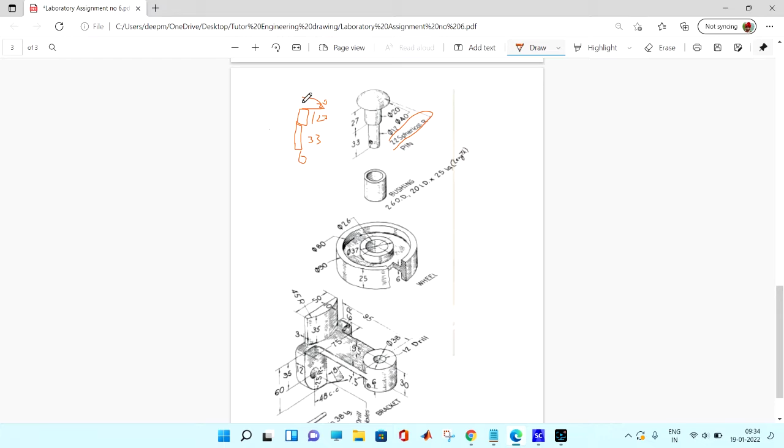Similarly, for this also we will make a rectangle. This is a rectangle of 10 by 27. This will be 27, and then we have to draw one of 20 mm radius. Over that we have to make a spherical radius pin. Okay, this we will revolve 360 degrees, then we can make this one.

Similarly for the bushing, we can make two circles, and then we can extrude it or pull it by 25 mm. This we will make in a similar fashion, similar rectangular blocks, and we are going to pull it about these axes, sorry, revolve about these axes. Like this we can make the different elements.

So let's see, and we can draw this one. The dimensions you have to find out, because it's very easy. When you draw it from here, you can see that the inner is 13 mm, so this distance from here to here is 13 mm. Then this small rectangle is 37 minus 26, that is 11, divided by 2, that is 5.5. The height is 25 mm. Like this you can find all of these things.

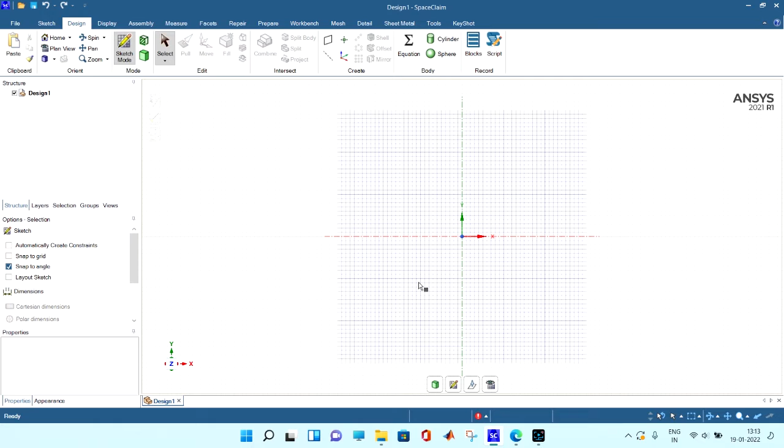Now we are going to draw the same thing. First we have to select the XY plane, click it here. Then, as I explained, we are going to first draw the pin. For drawing the pin, we have gone in the sketch and took the rectangle. The pin dimension is 6, tab, 33, press enter.

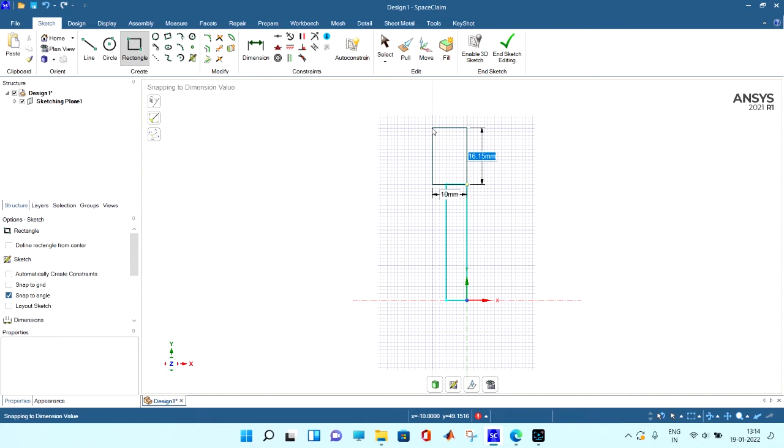Then scroll your mouse, you can increase or decrease the size of the figure. Then the shank portion of the pin is having the diameter 20, so I'm using 10, tab, 27, then press enter. Then we know that there is a top spherical cover, which is having a diameter 40, so radius 20.

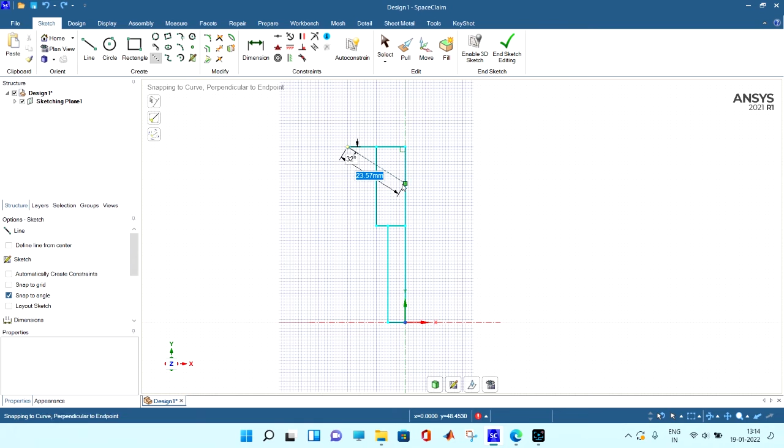And they have mentioned there that it is having the length, diameter of 40 and the top radius is 22. So this line should be of 22. This is coming here, so Control Z. We want this, actually we want the 22.

Okay, this came the 22. Then we can take a circle here, we take the center there when we are saying it, that it should be like this. Okay, this radius is actually 22.

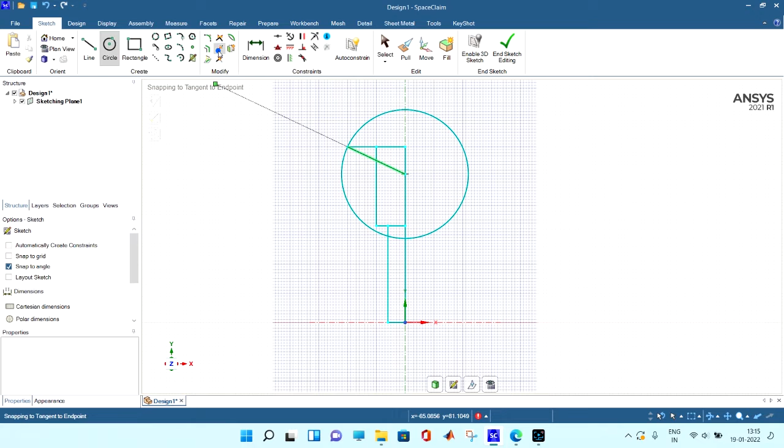Now we can go here, we can remove. If you remove this part, then you know it will remove that also. So just gone there. Now we have made this.

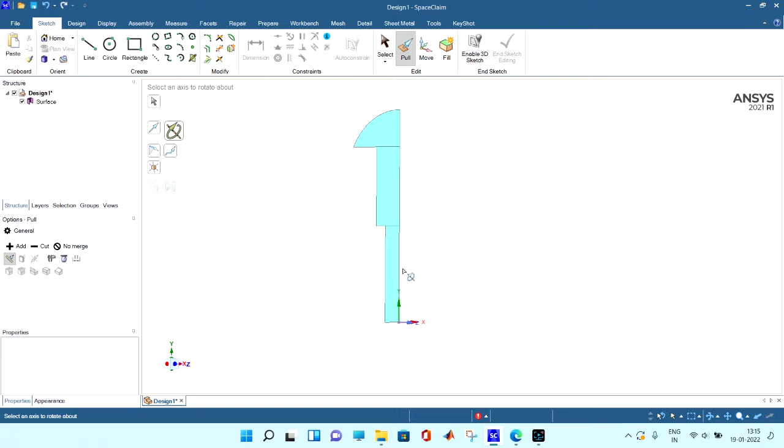After making this, we are going in the 3D portion, and what we have to do with this, we have to use the pull tool, we have to use the revolve. It is asking select an axis, it is asking select one or more faces. I am control 1, control 2, control 3, 3 faces, enter, press the space bar, then this will come.

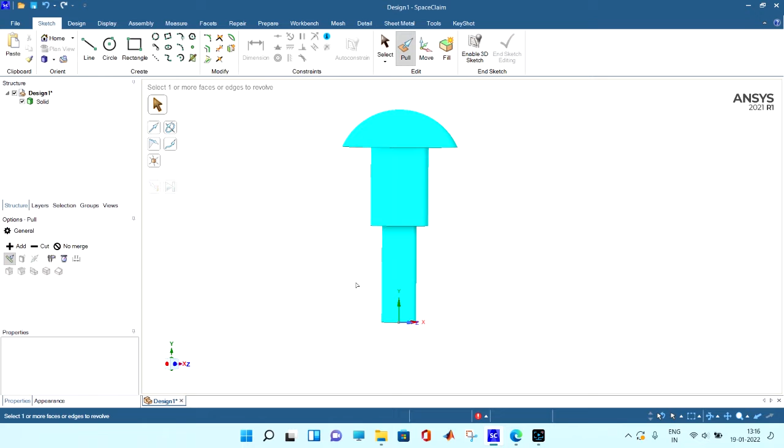You have to press how much degree you have to rotate it, revolve it. I put 360, then you can see that my pin has formed. So I'm going here, I'm saying rename it with the name pin.

Okay, I have not put the hole here which was available there. I'm putting it into a move to new component with the name pin. And just I'm saying it, hide it.

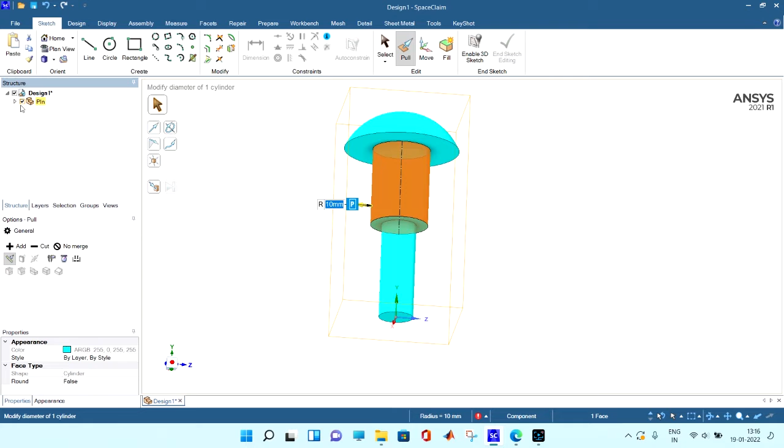Now I am going for the again new design sketch mode in the XY plane. I'm always like to make in the XY plane. I'm click it here, and you know that what actually I'm going to do. Now I'm going to make the bush.

The bush, we have rotated, if you know that the pin we have made in the XY plane, and when we make it in XY plane, then it has rotated in the Z plane actually. So if we make it in the XZ plane, then it will be easy for us.

XZ plane, in the XZ plane we are going for the circle. The bush is having the inner diameter of 20, enter. The outer diameter is how much? 26. And just we are going to make it solid.

Then we are here, we are making it delete. After delete, we have clicked it here. We are saying the pull tool of how much length? Of 25 mm length. This is of 25 mm length.

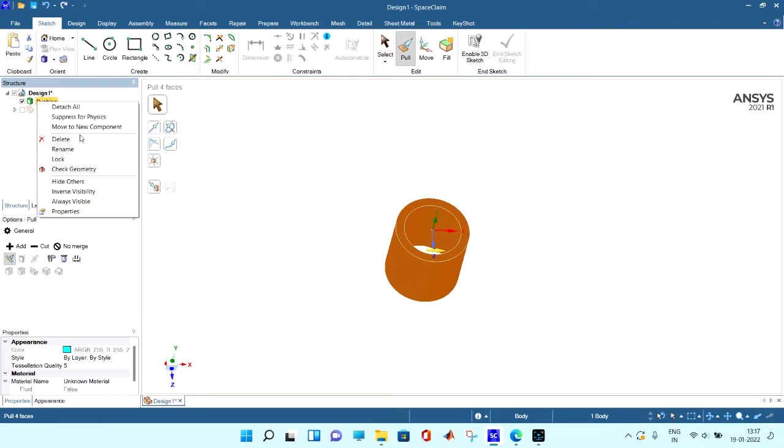This bushing is ready. We are going to rename it bushing. Then we have gone to move to new component, bushing. Then again I'm going to hide it.

Then again now I have to go to make the wheel. For the wheel also I'm going to make the XZ plane. In the XZ plane I'm going again sketch mode in the XZ plane. Okay, I'm not going in the XZ plane.

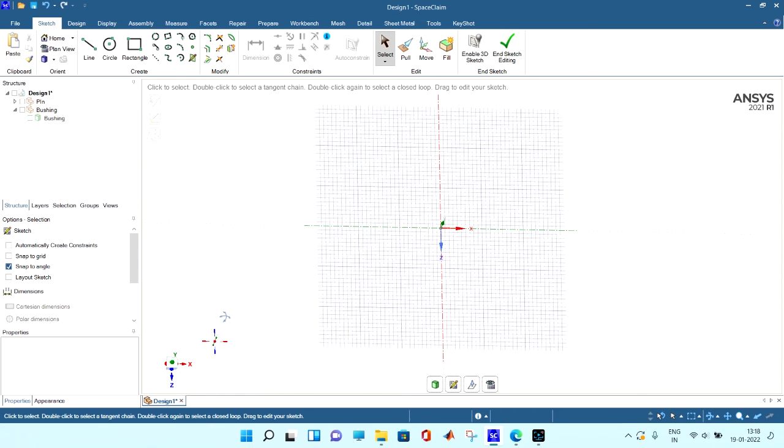I am going in the XY plane again. Why am I going to the XY plane? Because again I want to revolve. How do I want to revolve? This is my line from the center.

This is my reference line. From my reference line, what I am going to do is I know the dimension for the wheel is how much? That is 5.5 to 13... 5.5 to 25, sorry. So I'm going from here, that is 13 mm from here.

Okay, but I don't want the line here. Actually, I want the circle. So I want the rectangle, and from where I want it, actually I want it at 13 mm. Just go from here.

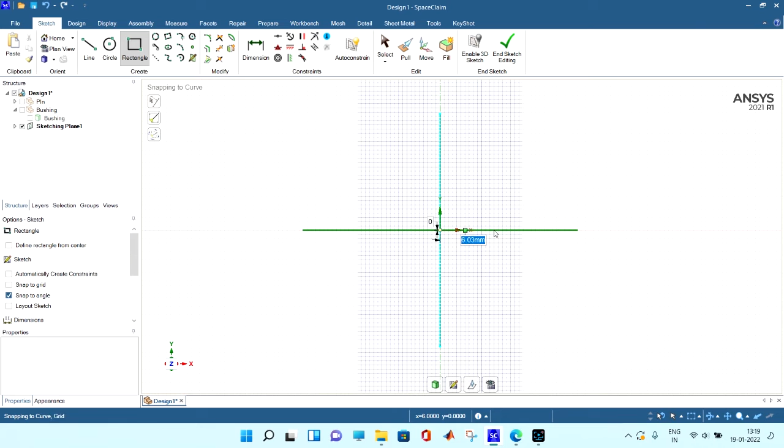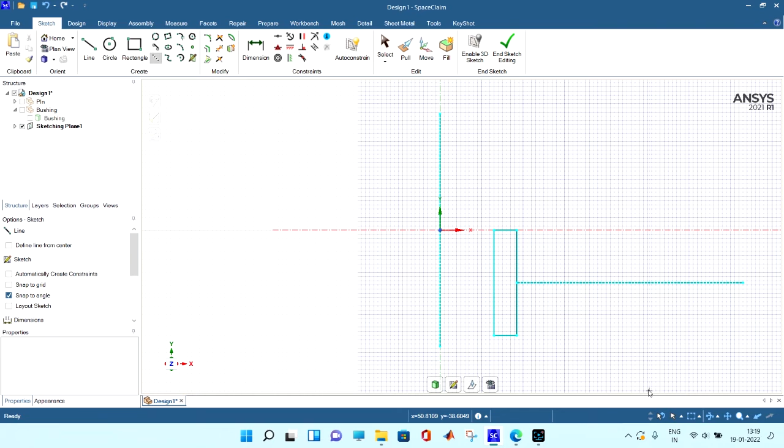I should make the rectangle at 13 mm from here. And what is the dimension of this rectangle? That is 5.5 tab 25. Okay, and we know this is the center line. We know we need this center line. We can draw it like as it is.

Now from this center line, actually we have to make a web, which is having 25 mm of length and 6 mm of height. So I'm again saying the rectangle, we are saying the shift, we are saying the 3 mm. That is 0 tab 3.

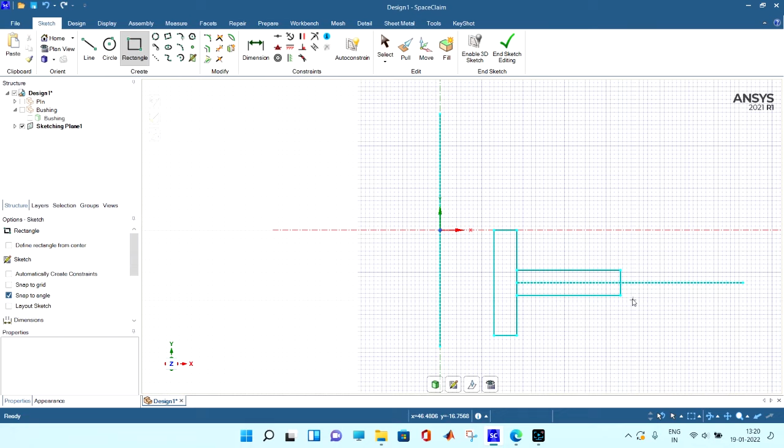When I'm going here, then I'm again asking the dimension. I know this, I have to take 25, then in tab I have to put 6, then enter. Then what I have to do, from this line I have to make how much? 25, the top. So means to say this is also 25. So this line is clear. Height is 25, but what will be the length of this one?

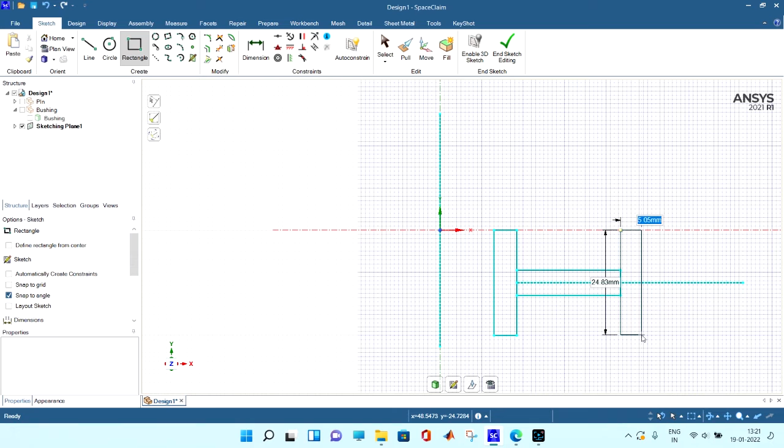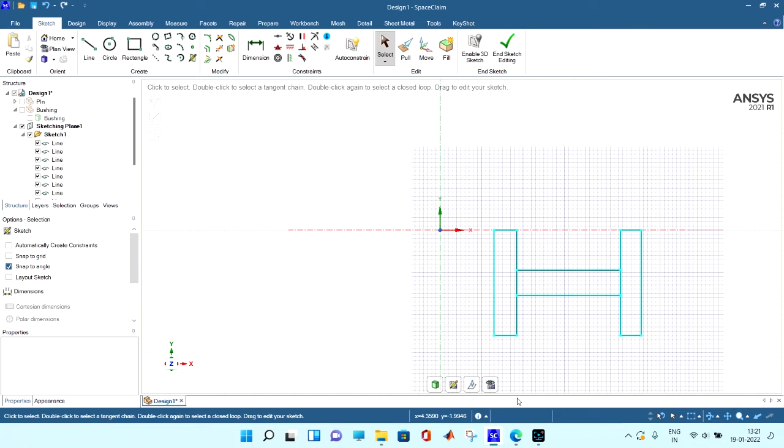This is of 5, tab 25. Now you can go and you can delete this if you want. Then you can delete the construction line. I have deleted that construction line also, but that delete is not required.

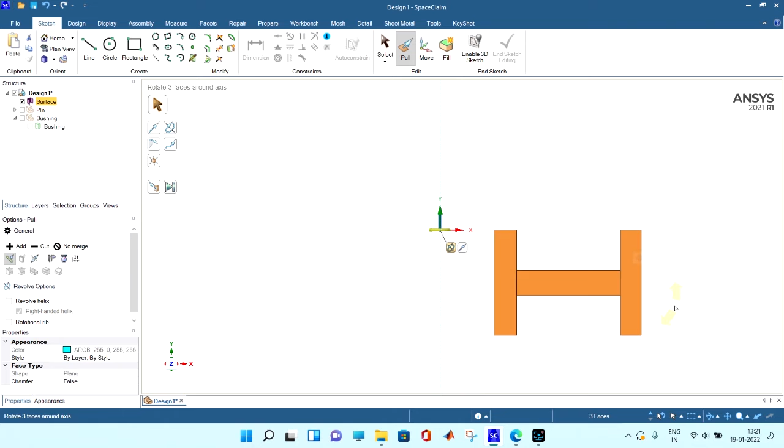Then I'm doing the revolve. When you click the revolve, it says select an axis to rotate about. Then I select this axis, and these are the faces. Then I press enter. It is asking how much degree I want to revolve. Then you can see these things are ready.

Now this is my wheel. New component, and I'm saying this is wheel. Now I want to put all the things together.

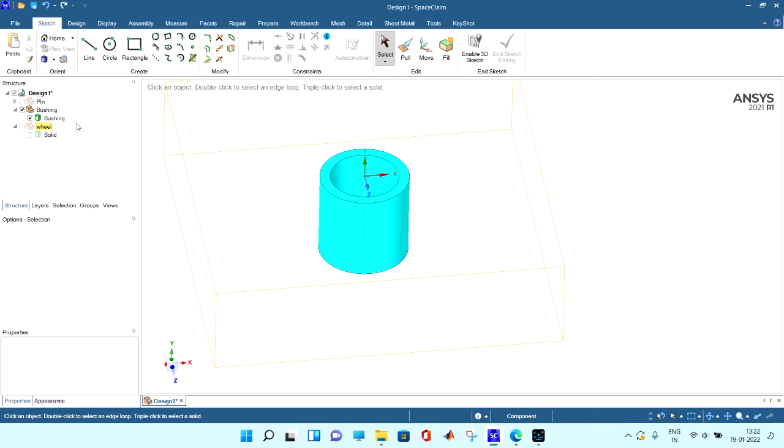Nice things, can you see? Actually, I'm going into the bush, properties of the bush. I'm just changing the color of the bush. Okay, I changed the color of the bush.

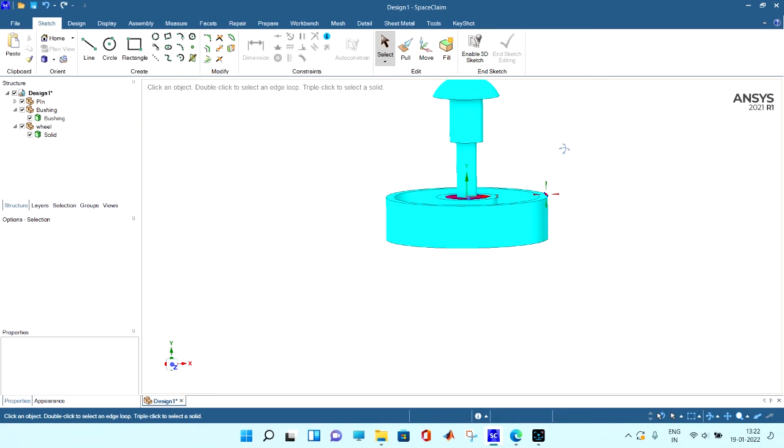Now pin, now the wheel. Now you can see. After that, if you go in assembly there is an option for align. This is already aligned.

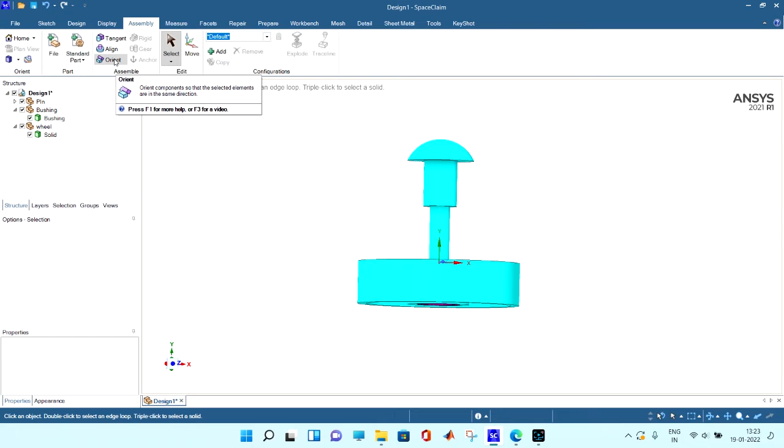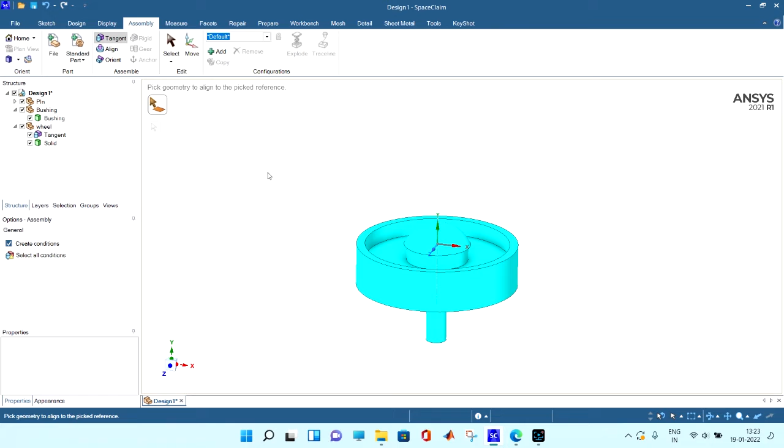Tangent is a much better option. I'm saying this touches this one. This will touch this part. And we know we don't want this. What we want? We want this pin.

Sketch, move. This pin should be 2 mm upward.

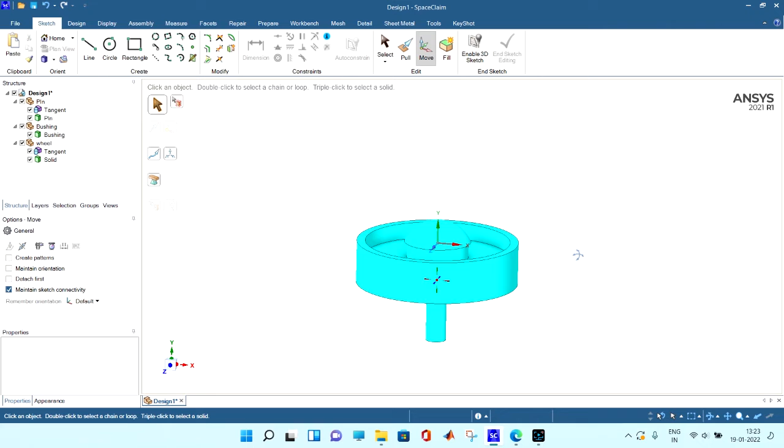What happened? Just Control Z. Okay, first of all, these things. Now I have clicked on the pin and I am saying 2 mm.

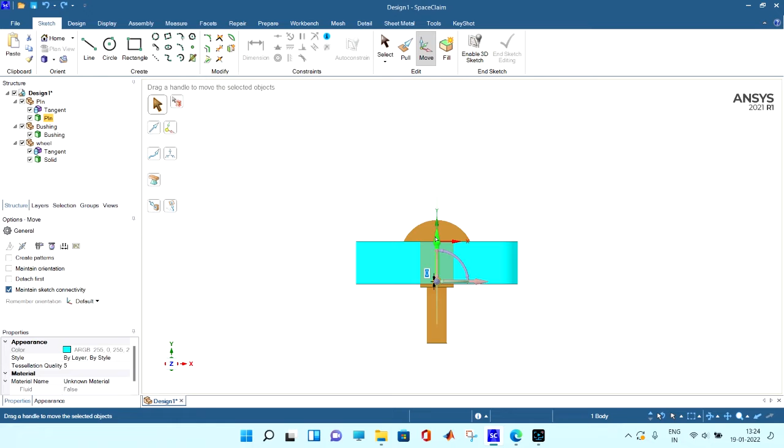When it is going 2 mm, so sorry, Control Z. Actually, I have to press it there, that is minus 2 mm. Why is the minus 2 mm also showing the problem? Control Z. Okay, this is here.

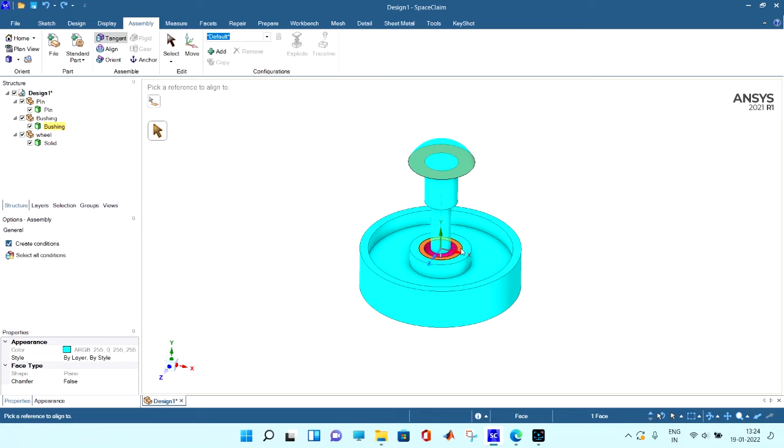I'm saying that this should be the tangent to this one. Actually, when I make it tangent to this one, if I'm moving the pin, the whole bushing is going to be moved there. So now I'm removing the tangent. I have removed the tangent, then I'm saying move the pin.

Now you can see we have to be aware of all of these things. Now you can see this 2 mm pin is moved upward and these are just perfectly aligning here.

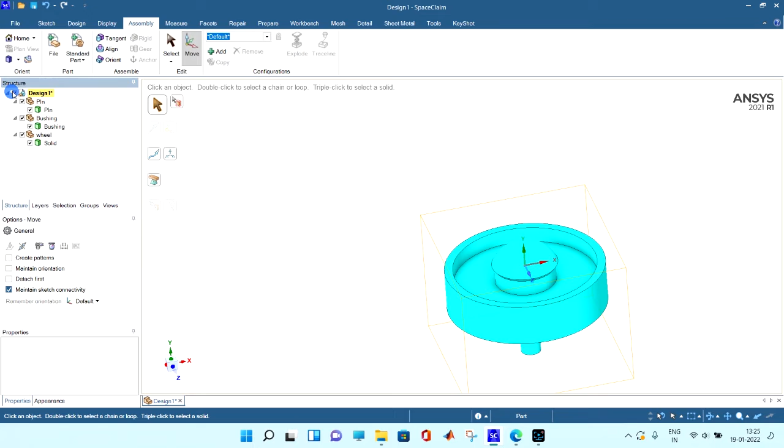Now we can draw the other part also, what is given in the query. So I'm again going and saying okay, hide all the things. In sketch mode we have gone, in design, in sketch mode we have come here. Then again you can think that we have all the geometry in the XY, so we are going to again...

Are we going to revolve? We are not going to revolve, then we are going to the XZ plane. Okay, in the XZ plane, what are we going to do.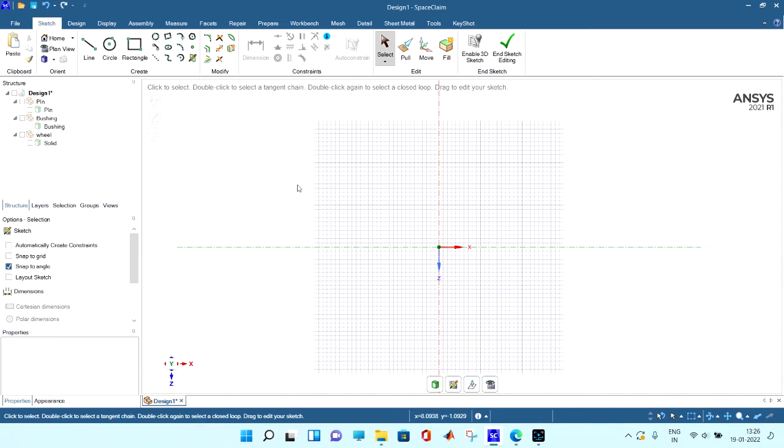Circle of how much? Circle of radius of how much? That is 38. 38 is the outer, inner is of how much? The 12 mm.

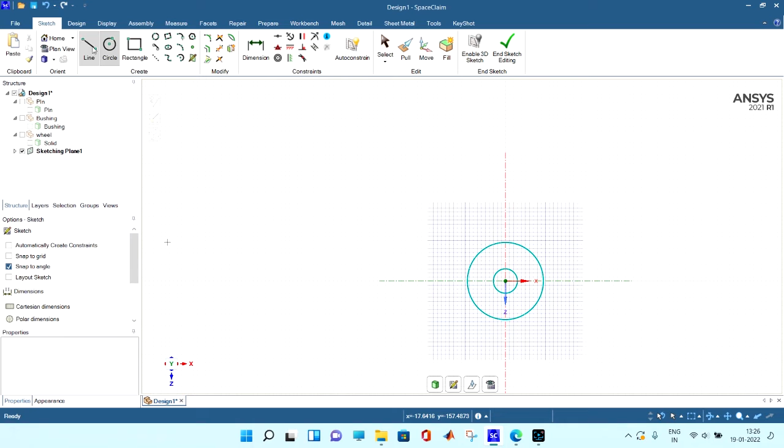12 mm, and we know this tangential dimension is of how much? This is of 85, not exactly 85, it is approximately 85. It is of 85.

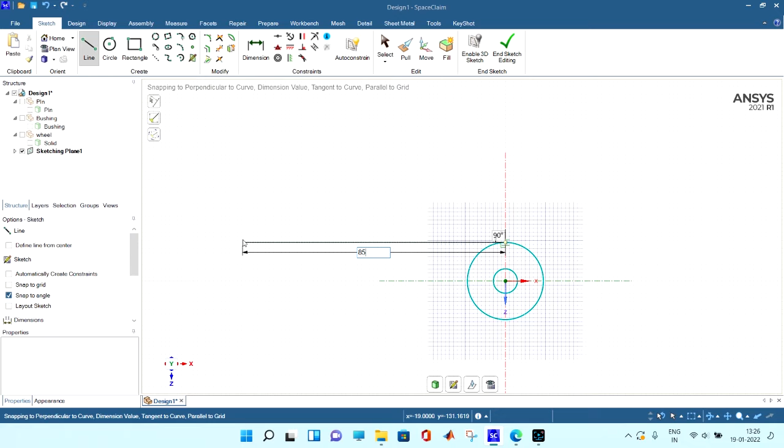I'm not sure from here, so I'm saying again 85. And this is 85 here. Okay, this is again 85 here. Okay, after making this 85, we know there will be some radius going there, but we should know how much dimension of all of that things are available there.

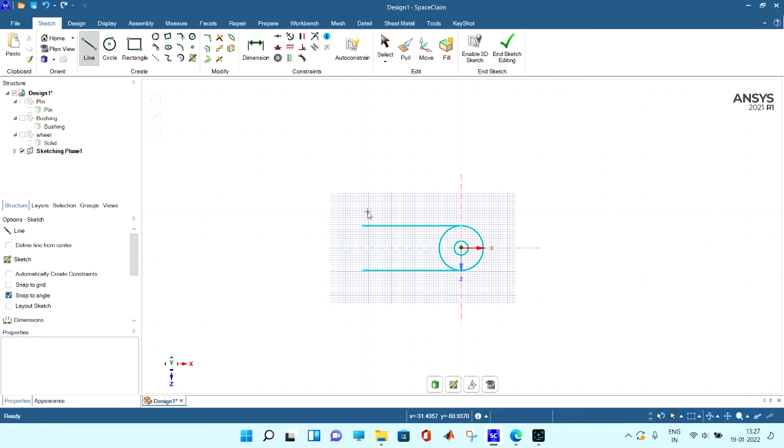So that dimension, for going to that dimension, what we can do, that is 12 mm is there, and how much dimension is a 48.

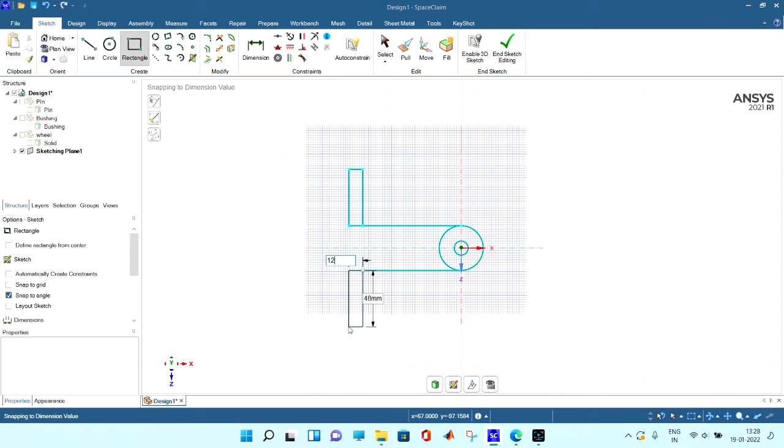Forty-eight 12, and now there will be a circle from this center line. From this center line, first you have to mark one of how much arc that is required, of 45.

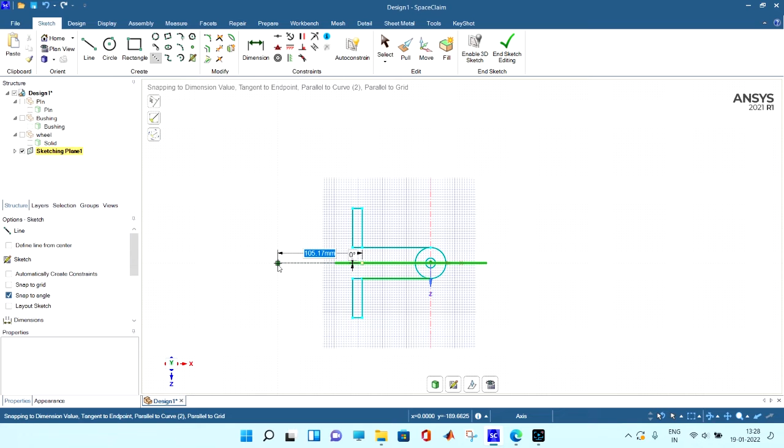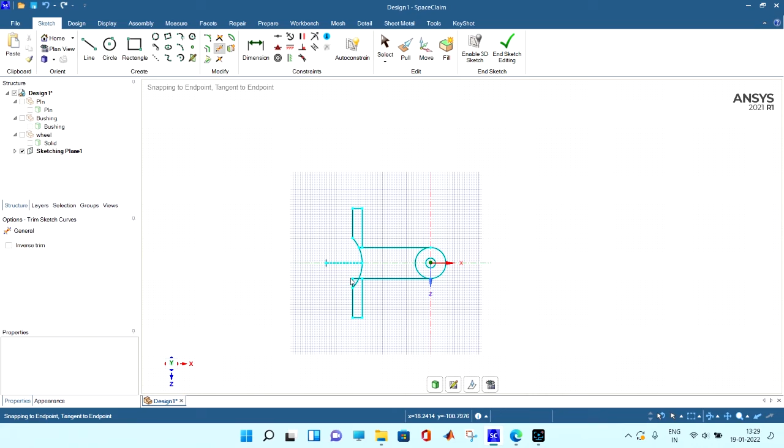Then what you have to do, you have to go from here, then you have to draw this circle actually. Then go in the trim point, then trim this part, trim this part, trim this part.

Trim this, and actually there is a 3 mm hole gap was there. So that you have to make from here to here, you have to make 3 mm. I don't know what are the dimension I have took, but you can take it 3 mm there.

Similarly, you can make it here also. But the best thing is there, I'm saying the mirror. Select mirror plane. I'm saying this one, this one. Okay.

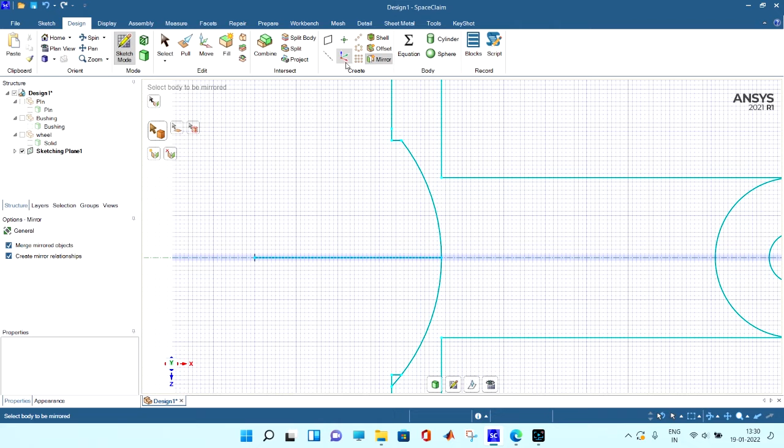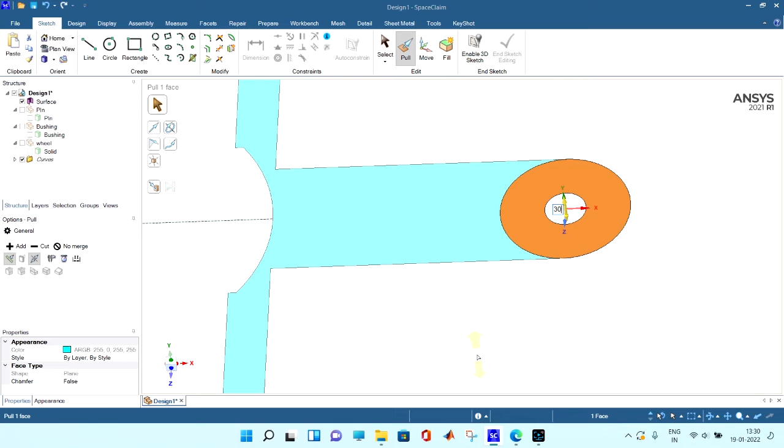Then I'm going to delete the remaining portion. Now I'm going to 3D mode. When I'm going the 3D mode, I know that this thing is not required, then delete it. Then we have reached here. Then I'm saying that on both the sides, then I'm saying how much is the length of that one, that is 30 mm. Then I'm saying the 30 mm.

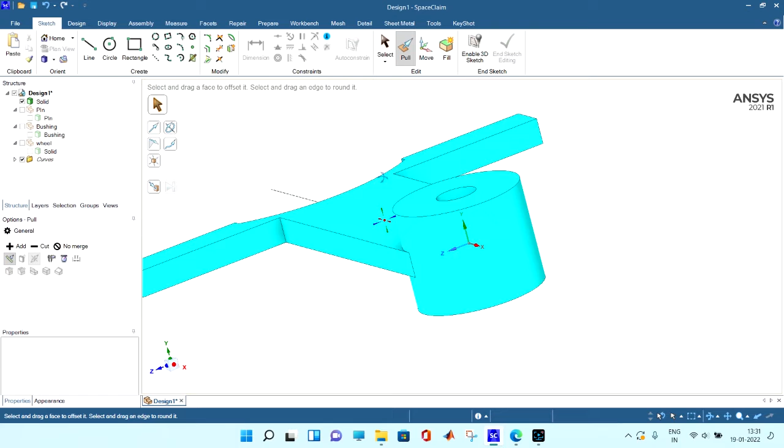Then I'm saying of this one, of how much, this one is of 7.5 mm. Actually I have done the mistake here, I have to draw the line here so that I can make this also the solid, but now that's not a problem. And I'm not going to make the below part, that you can just project it from here to here, the one rib, and the other things you can project one by one.

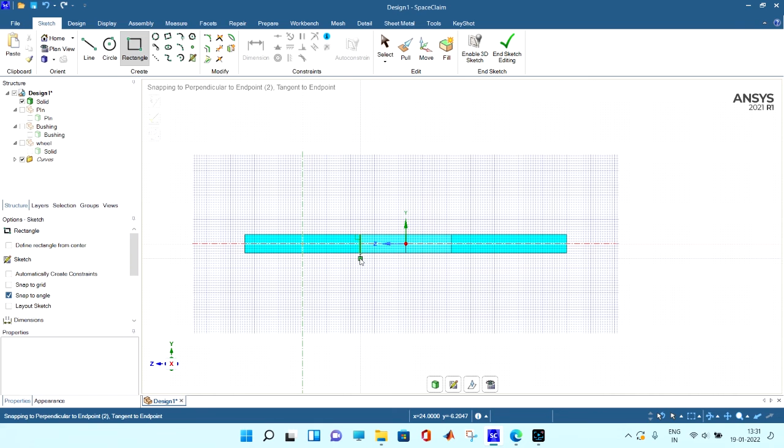If you want that, but I'm not going exact up to the dimension. That dimension you can go view like this. Then you can go the rectangular part, you know that this is, that part is there. Then from here you can go approximately 30 to 60, 30 tab 60.

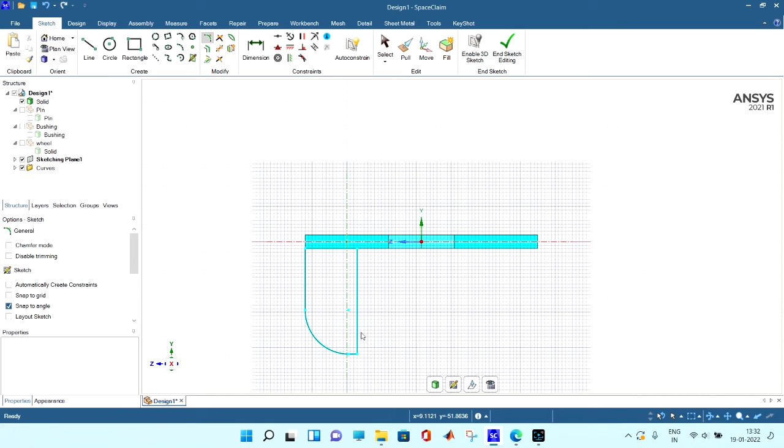Okay, 30 tab 60, and there is an option for arc design. There is an option, the arc option is there. That will ask you the radius, so that is available here, that is the 25 mm radius was available. Then there was one hole here that you can go approximately, because I'm just making the rough.

Now I'm going in the mirror. I'm saying this is the mirror plane. I'm saying this. Select the body to be mirrored. First of all, I'm saying mirror, then this is asking for the axis. I'm saying select mirror plane. I'm selecting this plane. Select the body to be mirrored.

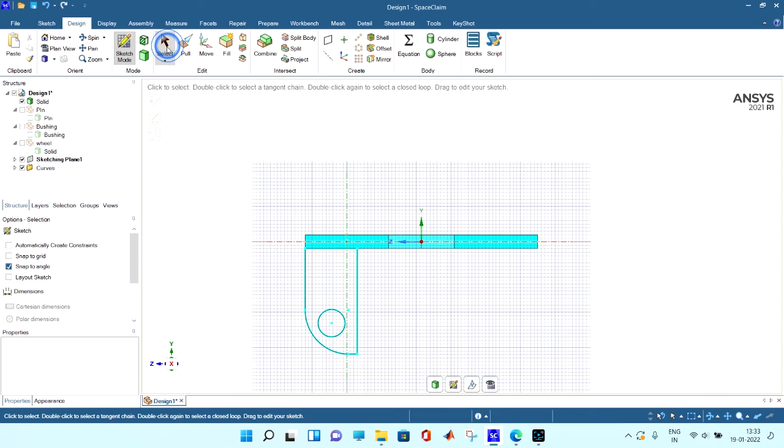So body to be, okay, first of all I'm going to say the mirror. A mirror, it is saying selecting the mirror plane. When I'm selecting this, it is not selecting it. Means to say I have to select the plane. Then I have to come out from the drawing to select the plane. So let's see, that's not a problem.

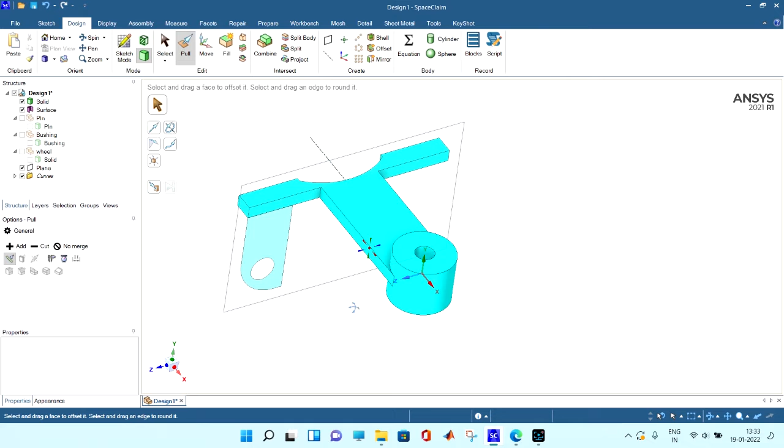We can make it outside also. Delete this part, delete this part. Then here you can extrude this part, extrude up to here, like this.

Oh, I have done one mistake. First I'm going to mirror. In the mirror, I'm just actually, mirror plane is not good here actually. Before doing the mirror I can say you why the mirror plane is not good here, because this is not a separate body. If I will use this plane to mirror here, this body is there, so the software is having the problem whether it should mirror here to here, or nothing is there which he has to mirror it here. So let's see what it will do.

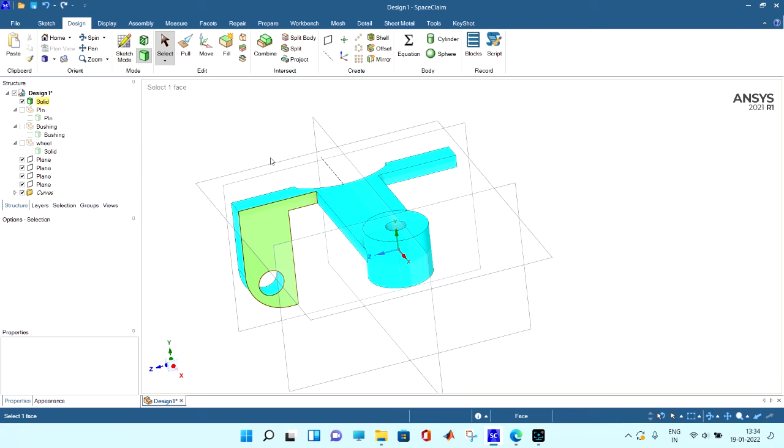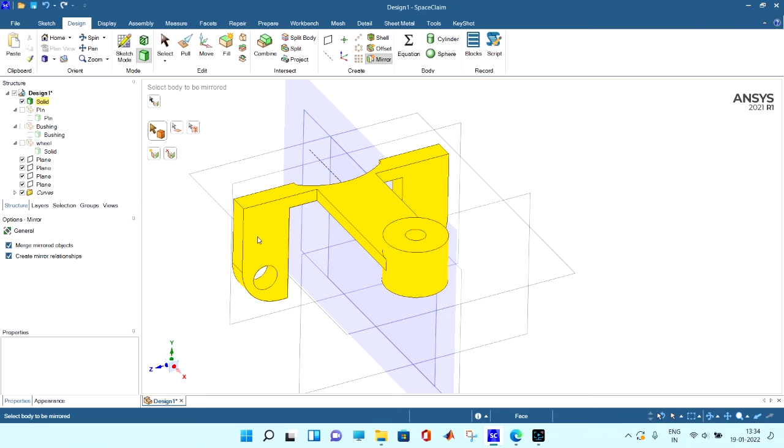Mirror, it will say select the plane, mirror plane. I'm saying the mirror. Then it has mirrored it as it is. But do you think the problem is what? This time you are seeing whatever the thing is there, because nothing was here, so he has mirrored it here. So this has not got much problem, otherwise the problem created.

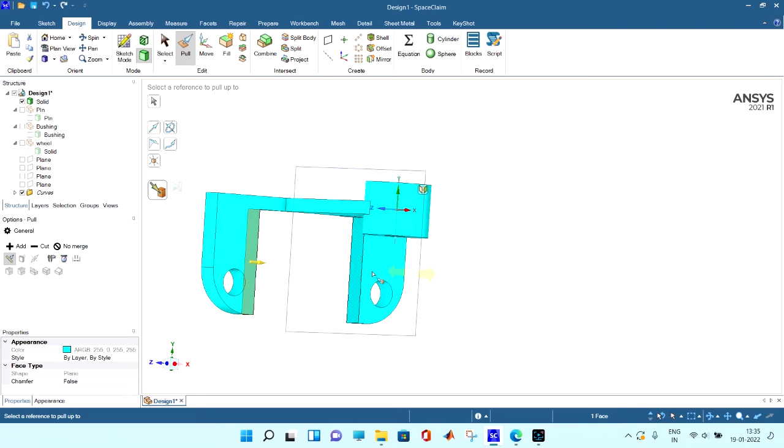I am saying the pull up to here, pull up to here. So that bracket is there. Solid, solid, solid. Okay, that has actually mirrored.

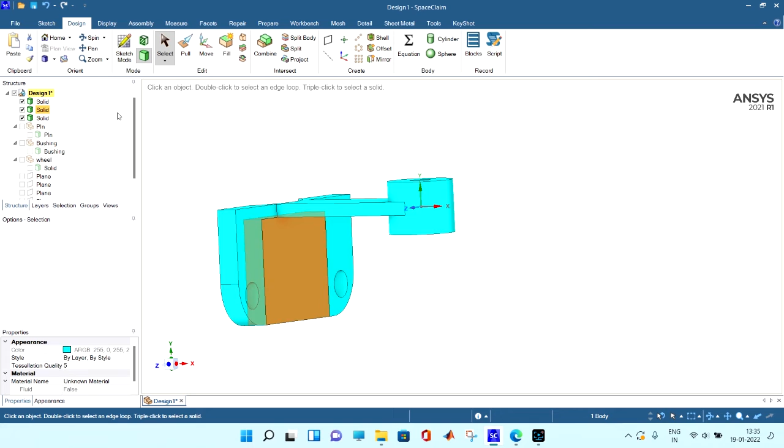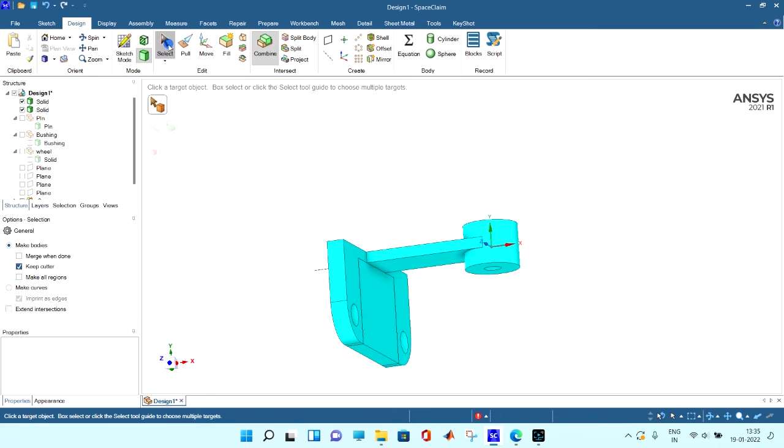I'm going to combine. Mission failed because the faces and edges could not combine in a way that works. That's not a big problem for us. Now, can we say if we want to see the whole body together?

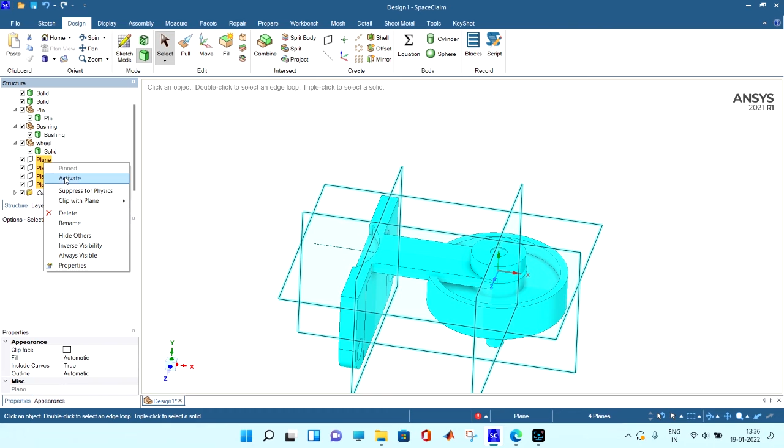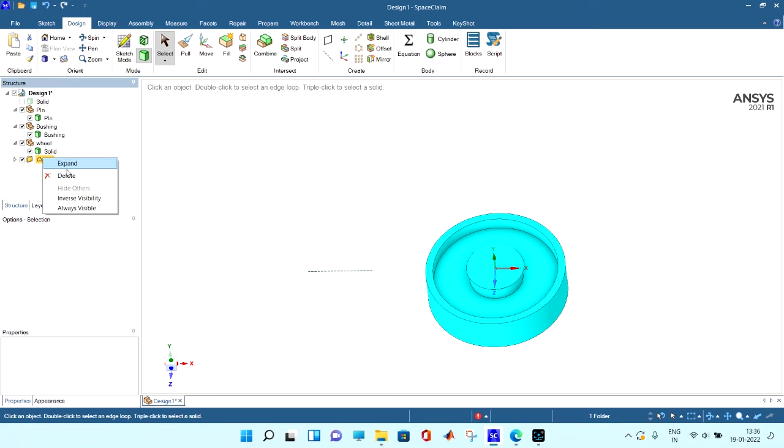Oh, we made the wrong part. First of all, we don't want these planes. Shift, delete. We know this is like this, this must be like this. But we are hiding this one, till this part is not required presently. Not required, we will understand it.

Now we know actually this part must touch this part.

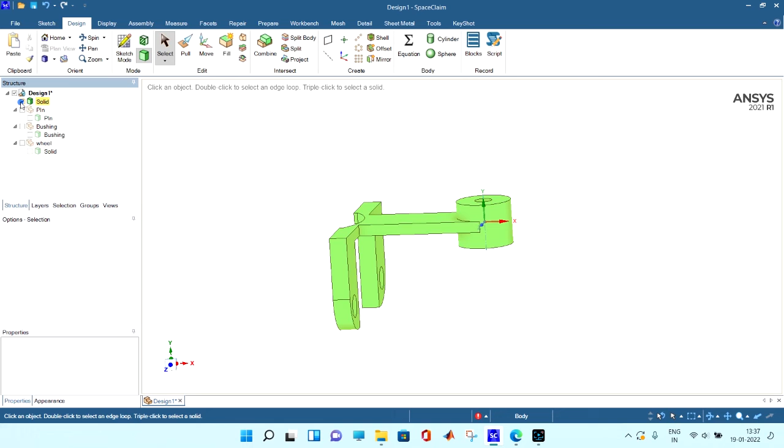Or we will show the other way, means to say I'm just showing this way, or you can just move this part. Solid, move. You can see this will go here and it will reside here. Okay, but how much we don't know, so we are just putting Control Z. We are not touching anything, and we are saying that assembly tangent, this part should be tangent to this part.

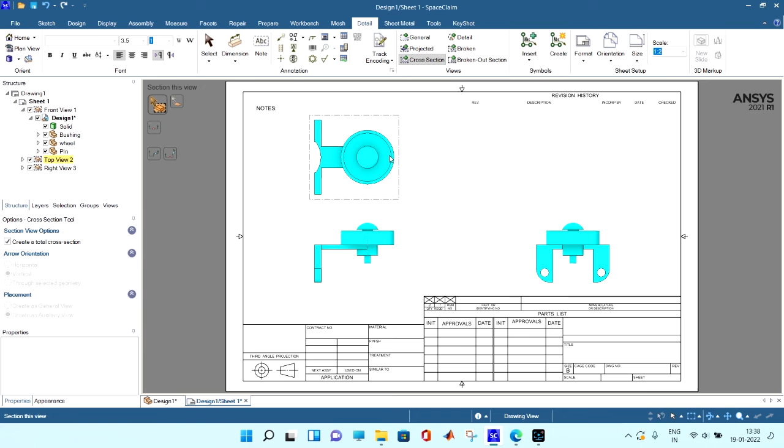Okay, can you see the drawing? Okay, like this we can enjoy it. Can we go in section drawing sheet? In the drawing sheet, this is there. Okay, if you will see it from the top, it will be like this, cross section. Select a drawing view to turn it into a cross section. I want to turn it cross section. At here I want a sectional view. Can I see my cross sections? Okay.

See, what's the problem is there. See the problem with the software. This has cut the pin also. That is not the correct thing. This one. And actually, what is there? What are we missing here? Actually, we have put the wrong tangent. We have put that tangent to there, this tangent to there. Actually, this part is tangent to here. Okay. So let's go and rectify it.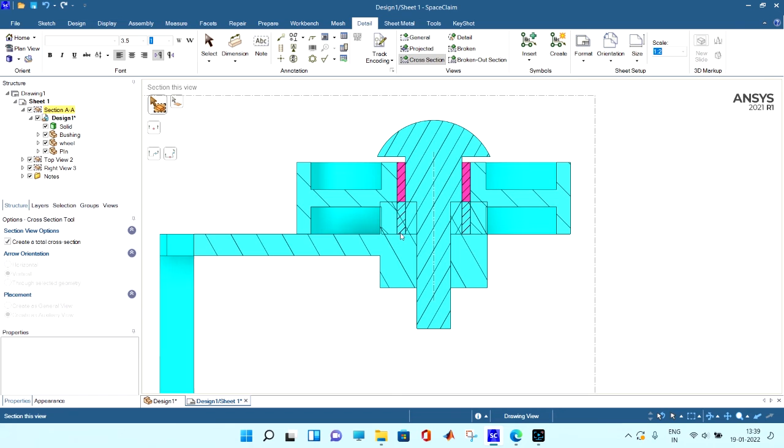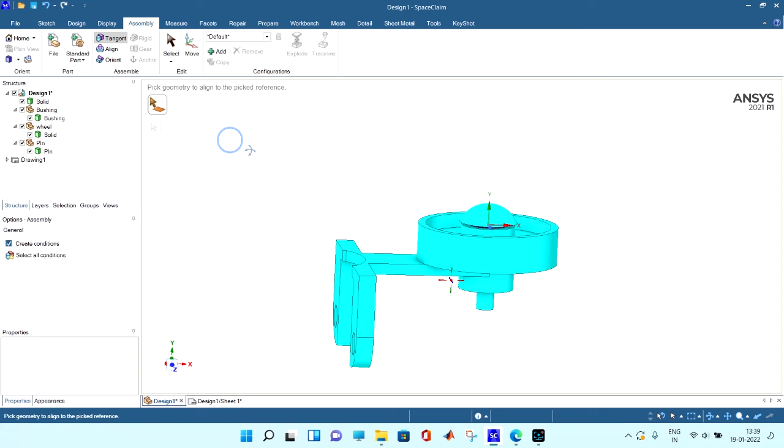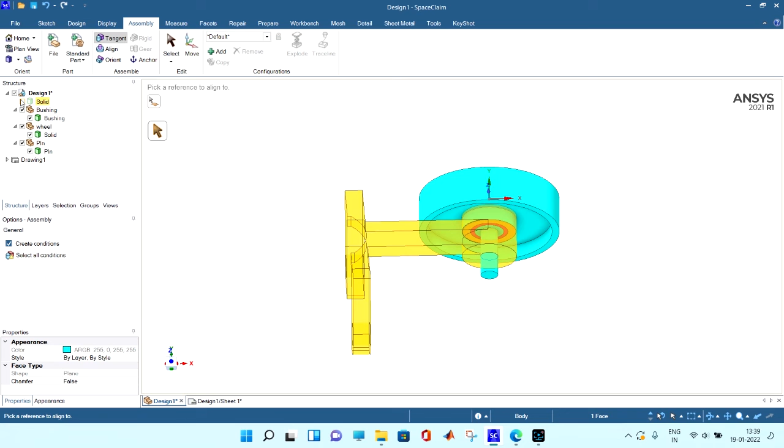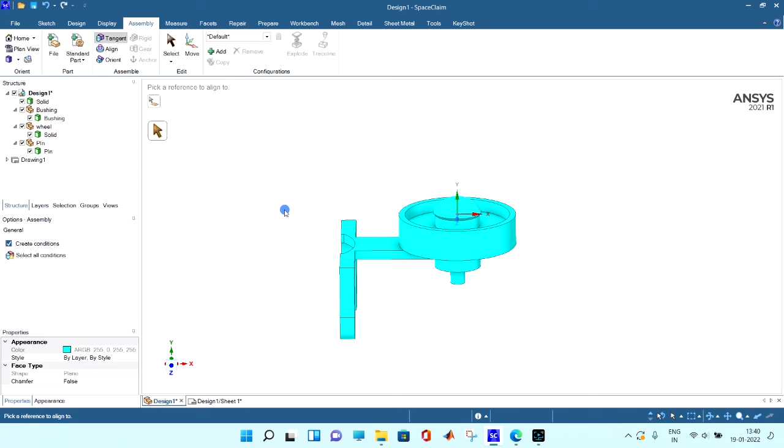Design 1, drawing 1, solid, pin. Why is it not showing the tangent figures here? Solid. Okay. In assembly mode, tangent. I'm saying this is tangent to, sorry. I'm saying tangent. I'm saying this is tangent to this part. Okay, actually previously I have made it tangent, but it is not showing that tangent here. So first I have to remove that tangency from there.

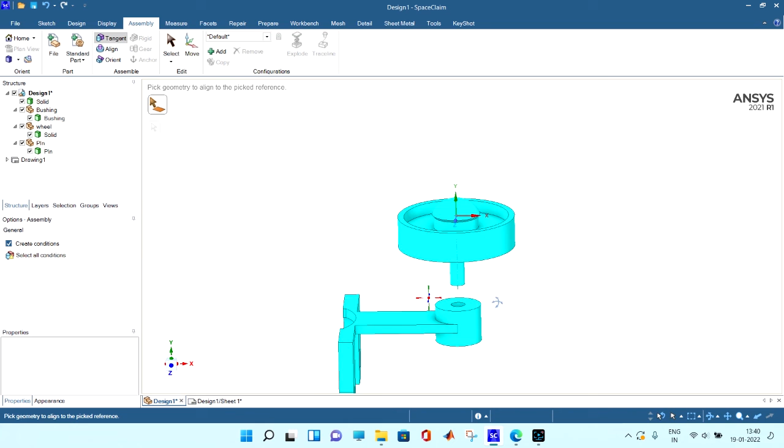Okay, first I am moving the solid. Okay, now what am I saying? Tangent. This part must be tangent here. Okay, this must be here. That I want actually, but when we are doing the tangent or any operation, that is coming here. But I have not brought it separately from other bodies, so I think it is not showing the tangent here. Okay, let's see.

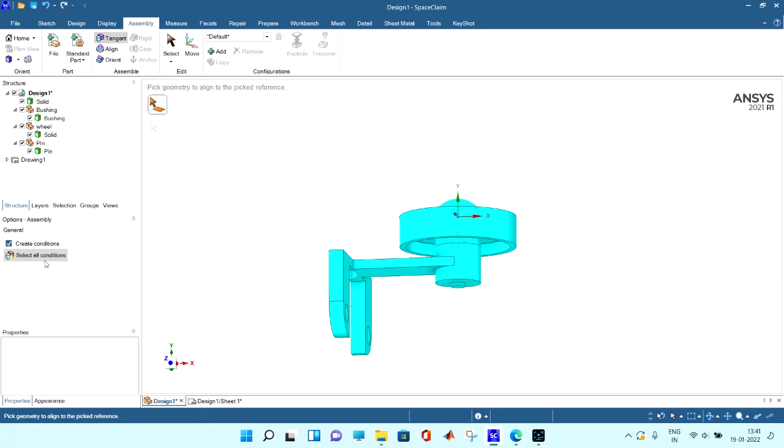Select all conditions. Now I'm going in the drawing sheet. When I reach the drawing sheet, you can see here this is the pin, this is the bush, this is the wheel, and this is the lower portion, and here there should be some hole which I have missed. Okay, can I go there back? First I'm going and I'm saying please change the property of this. I want it dark blue. If you want to draw a hole there, you can draw it.

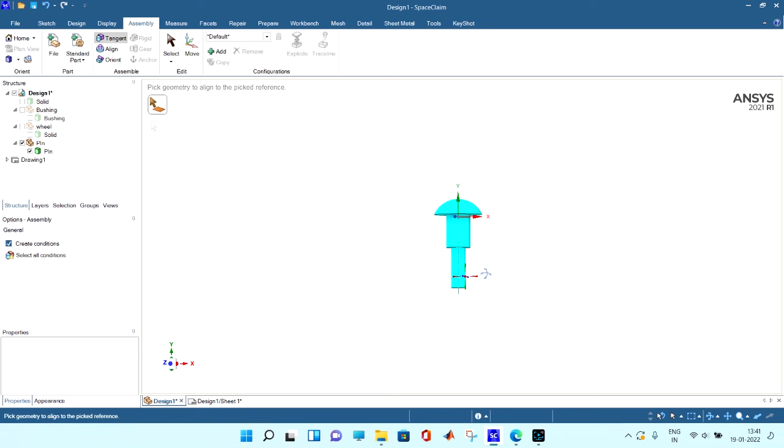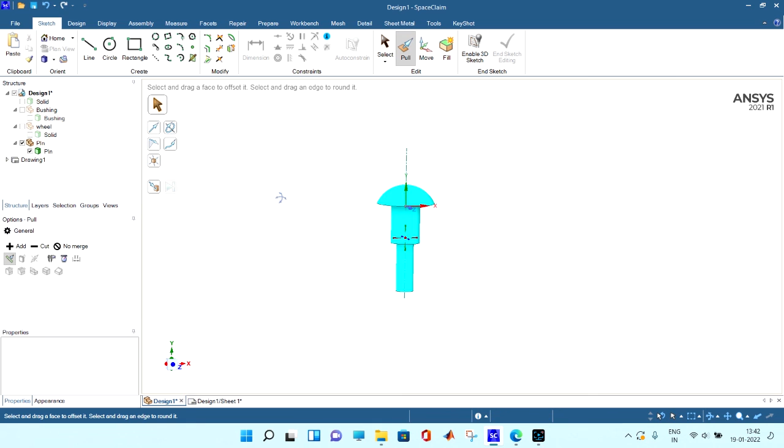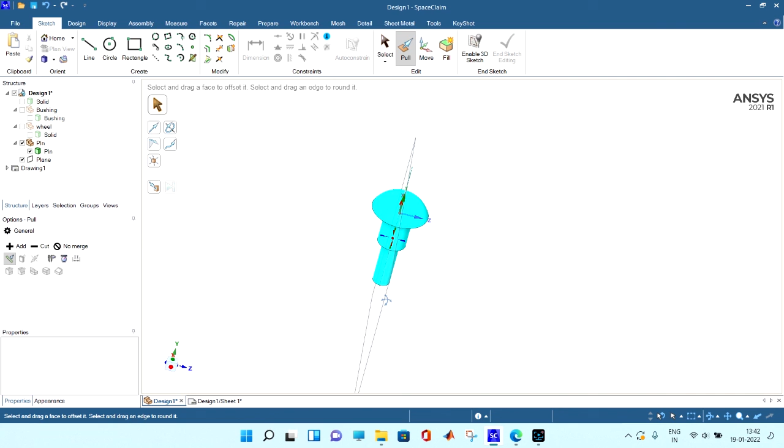Okay, just go in the pin, in the pin you can select this plane, sketch. Or instead of doing like this, what we can do, we can first design a plane. We can go and sketch on this plane. Is this plane at the center? No, wait, this plane is at the center, no? So design sketch mode on this plane. This is at the center.

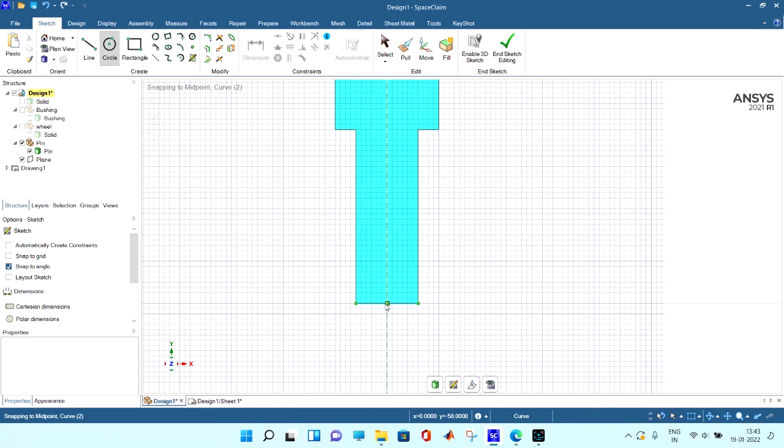The distance from the base is 9 mm. Shift, 9 mm. What happened? I used the wrong circle. So 6 mm. Okay. The 6 mm gap is there. Now go and use the pull tool. In the pull tool, use the cut. Cut.

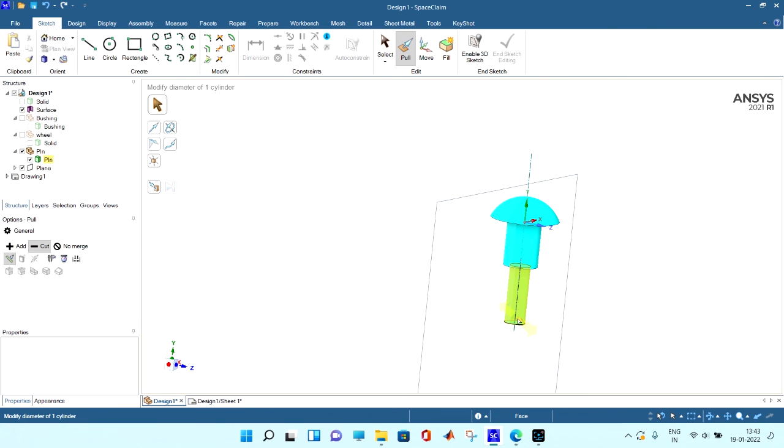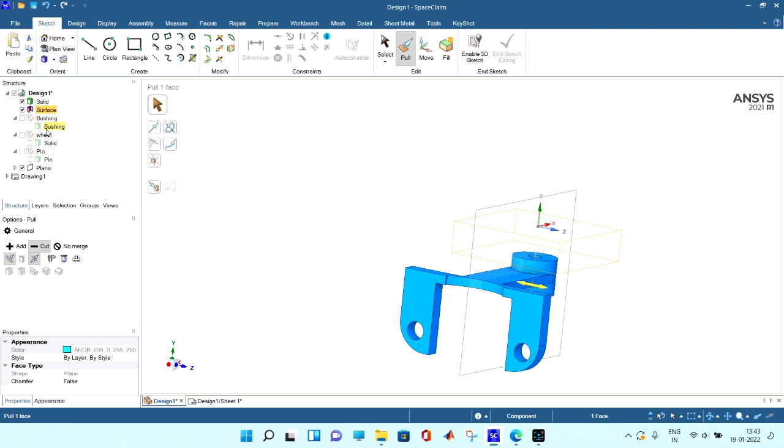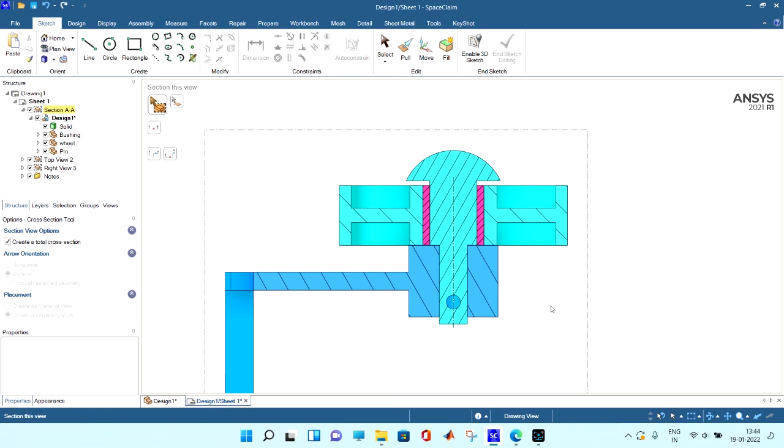Now we are not able to see that surface. So what we can do, we are saying that this is a pin, this is on both sides, this is the cut. Okay, this is the pin, cut both sides. Okay, then you can see the cut has come, and this cut has come. You can delete this plane, and you can say I want to see all parts. Then you can go and see in the drawing section. You can see this is as it is, what you made there.

Okay, like this you can do many other things. So this is enough for this video.